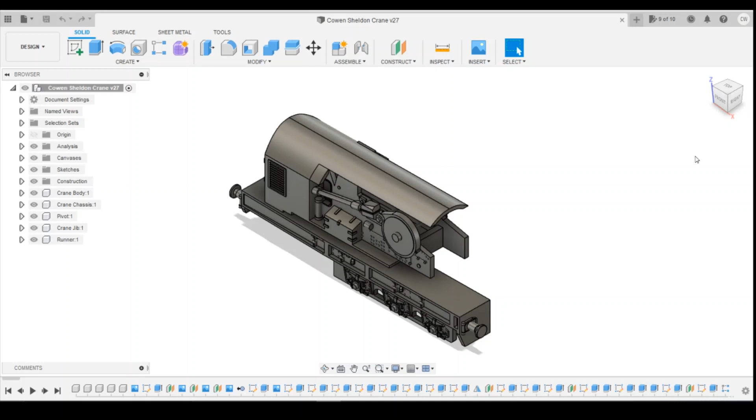The issue that we're going to have, or I think it might become an issue, is what we're going to do about couplings, especially if we start adding details. We're going to add it, and then we might have to think about potentially removing them in the future if they're going to get in the way of whatever we do with couplings, which is something that will need a bit of thought, because obviously 3D printed couplings, especially on something like this, because there's no lateral play, it's going to struggle to go around corners.

So it might be that we look best to have some sort of wire or hoop or something like that, something like a wire coming out of one of them and then a D-shaped hoop, a bit like a tension lock type thing. But it's something that at the moment is going to have a bit of thought on, and I'll pick that up in future episodes.

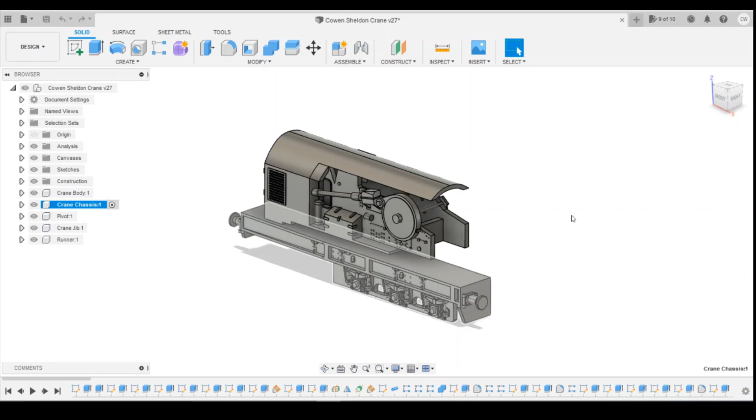Okay, so jumping into Fusion, let's make sure we've got the chassis turned on here. Okay, we'll jump down to the bottom here. So looking at the pictures, the location of them is slightly to the right of the buffers, and obviously they start below them. So we'll start by looking on this surface here. Now when I draw them, I'm going to want them to be connected to this surface so that they print. So I think I'm going to start by drawing this circular piece here.

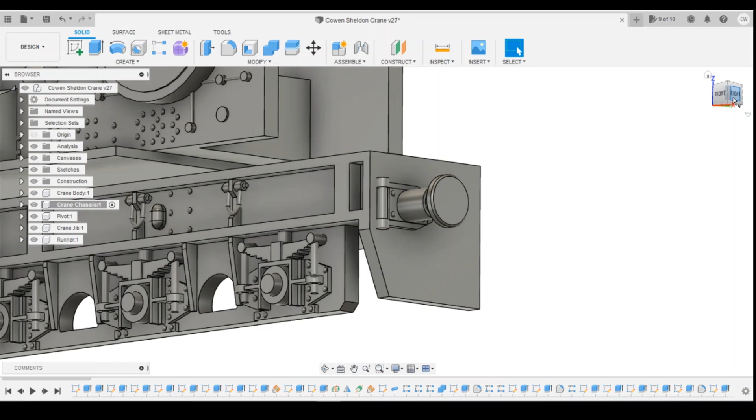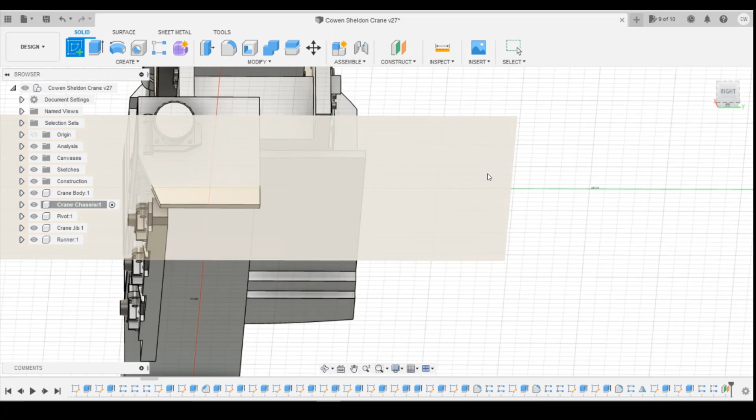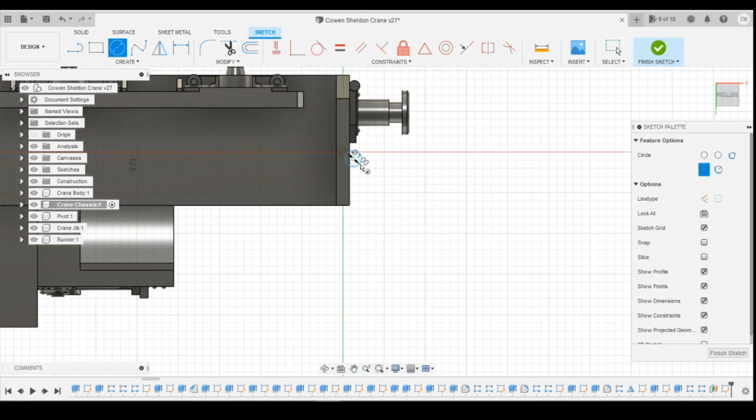So I'll be creating an offset plane from the base looking upwards. And looking at the picture, looks like it's about 6 inches up. So I'm going to go about 1.3 millimeters up, I think. Okay, then we can create a sketch on that surface, and then I'm just going to be using a circle. It's going to be off to the side of the buffer here, and I think we're going to go back here. Okay, so let's go for a 1 mil diameter circle, and define its position.

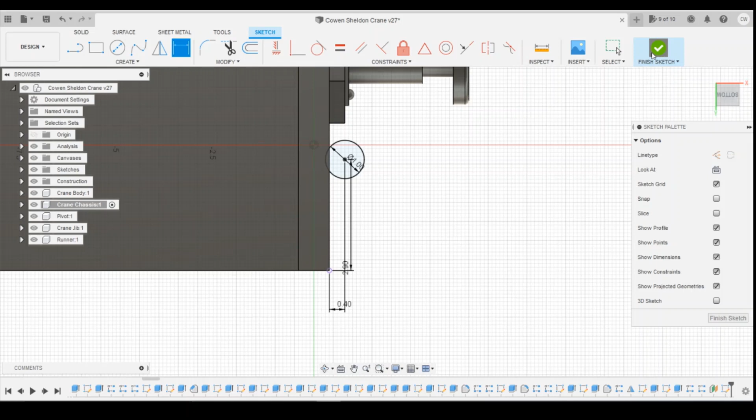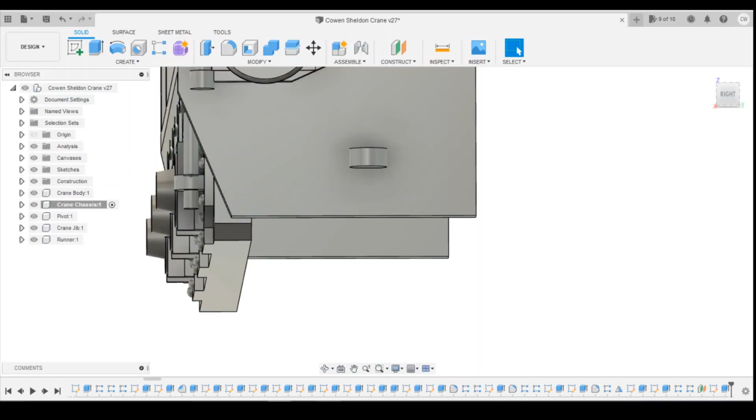So looking at the picture, it's not particularly thick, so I'm just going to drag that upwards, maybe half a mil to join. Okay, so these clamp-like shapes, I'm going to do an offset plane coming forwards from this face here, and I want that plane to intersect the middle of the circle here, so it's 0.4 millimeters, and then I can draw on that surface.

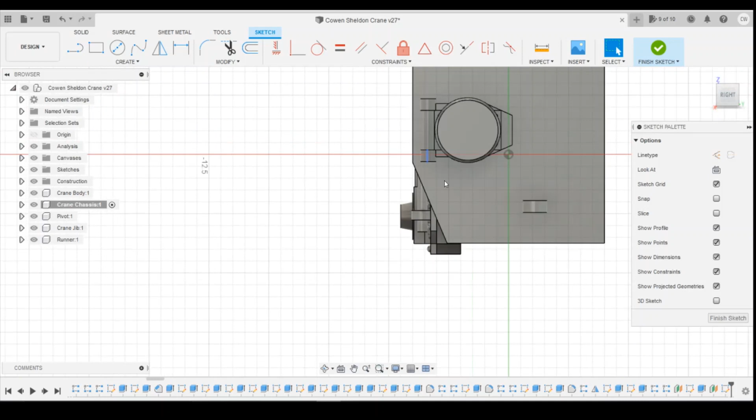Okay, so let's have a look at the shape. So it's like a little bit of a circle, hole in the middle, and then a cut out at the bottom. So easiest thing there is if we take a circle, let's do a construction line actually. So if we come across, we're going to want a construction line going upwards. Like that. Just want it to be turned to construction. Define the distance from there to there. The other way. Delete that. From there to there. It's 2.9. So now we know we've got the centre point of that circle.

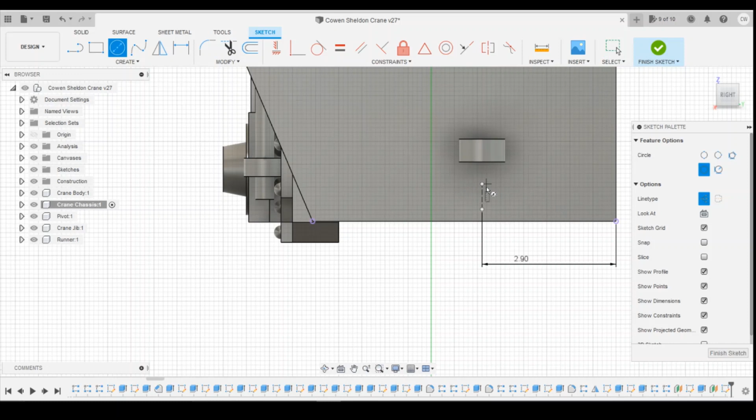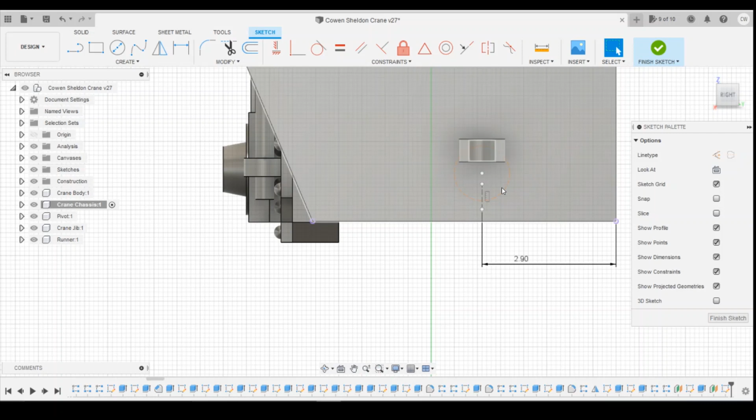Okay, so we can now snap a circle to that line there. Are the clamps bigger? Yes, they are slightly, so we need it to be bigger. I'm going to go for 1.2 mil. I didn't want that to be construction. Turn that back off. That's it. And define its position.

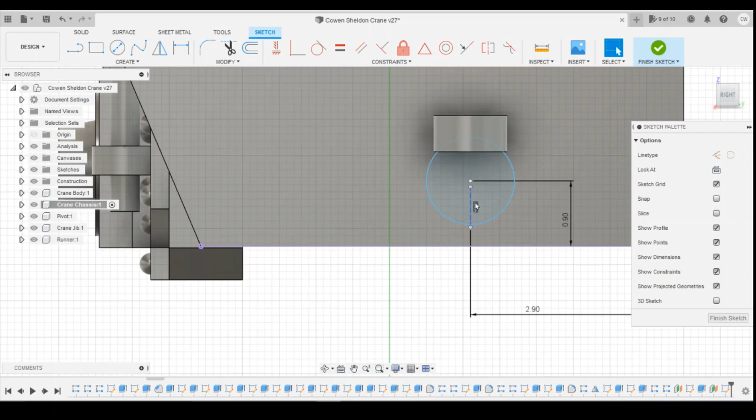I'm going to bring that down slightly. Maybe a bit more than that. Okay, and just for neatness, we'll define its position. But let's try again. So that circle to that point there, 2.9. Define the radius.

Okay, then we'll put another circle on the inside of this. Let's give it a clamp shape. I think I'm going to go for 0.7.

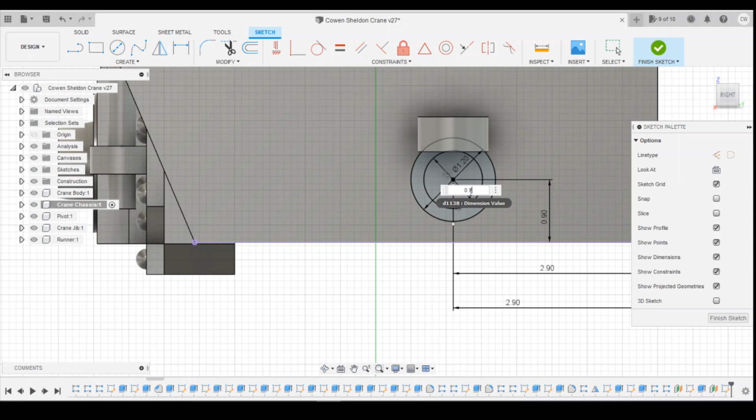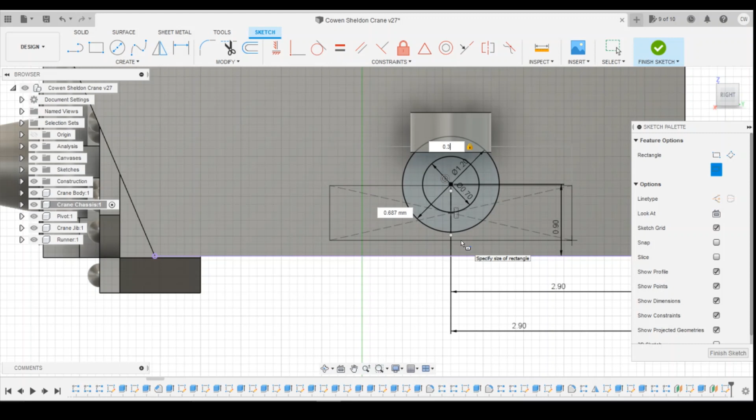Okay, and then just going to do a little rectangular shape. Let's use a centre point rectangle actually. If we line up there, it's going to snap there, and come down, and across that I'll open those up. And all this rectangle is for is so that we can select that as a profile, and we've got the open jaws type shape.

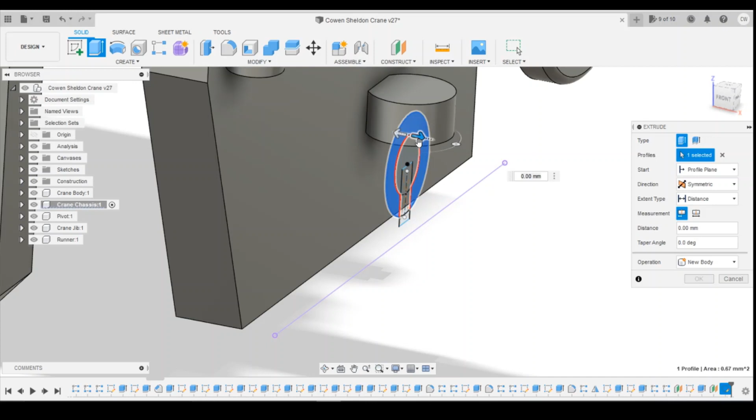If we extrude this, I'm going to extrude it symmetrically, I think. I want that to jump into this back plate here. I want it to join. Okay, does that look right?

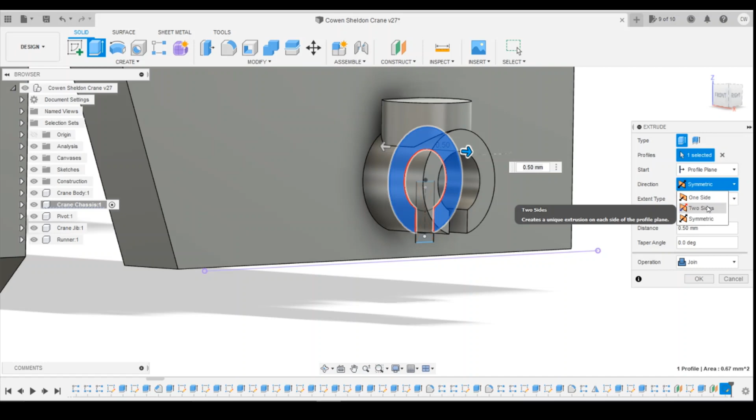No, it's quite thin, that's probably not going to work. So if I go change that from symmetrically to two sides, let's bring this one in. I want it touching the back so it's got some support, so when it prints it's clean. Yeah, I think we'll go with that shape.

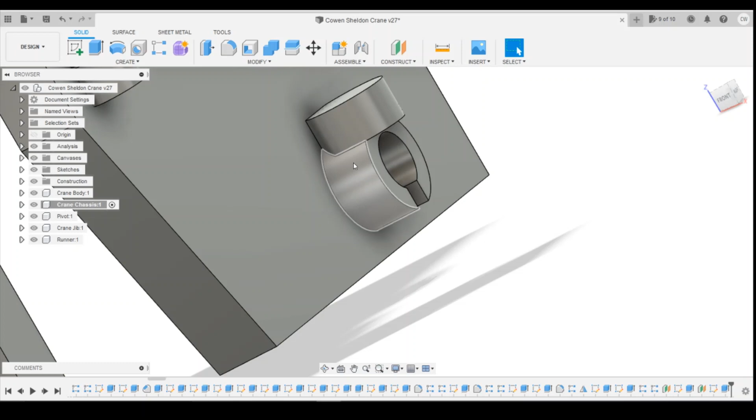If you wanted it to just be sort of hanging, don't extrude this to the surface here, but I think in N gauge you're not going to see it, and I think the supports are going to be much better doing that than they would be trying to catch the floating parts.

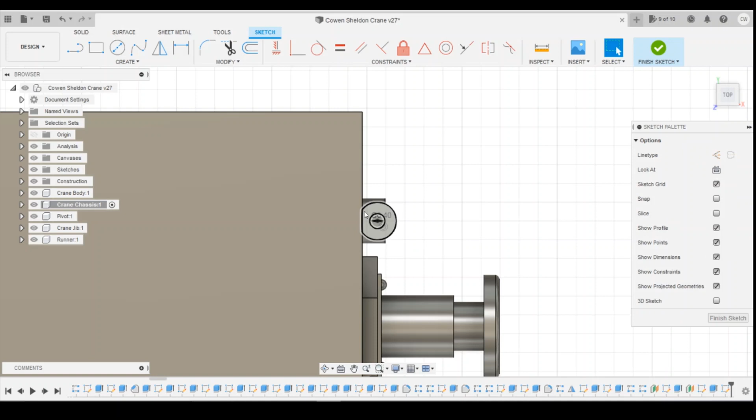Okay, so the next thing we'll do is draw up - there's a tube that comes up from here, so again we just use a circle in the middle there, and we'll go up 0.4 millimeters, so it's got a little bit of meat on it. Extrude this upwards.

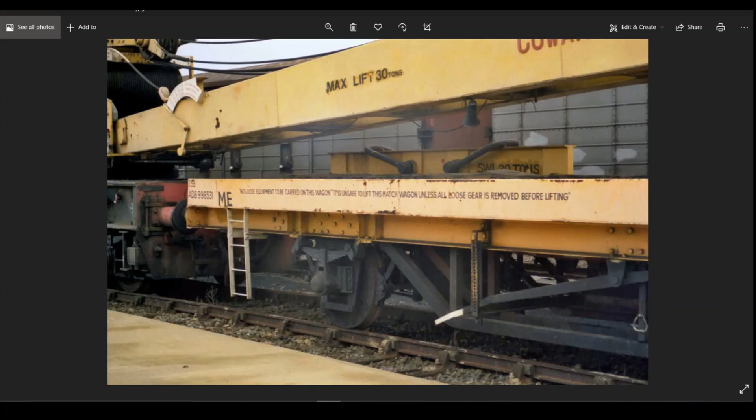Joining. That means some of these haven't joined. No, they're all fine. Okay, so height of this bit is still below the buffer.

So let's have a look where that brings us. Yeah, it might be too long. Bring it down a little bit. Yeah, we'll go with that, 1.4.

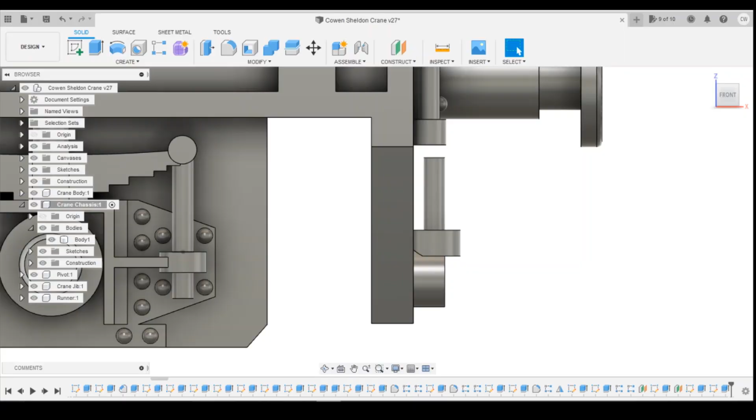And then it's got like another circle on the top facing the other direction, and then a loop. Okay, so for that we draw an offset plane from this one, and if we come 2.9 millimeters, that'll put us in the center here, and then we can draw on that plane.

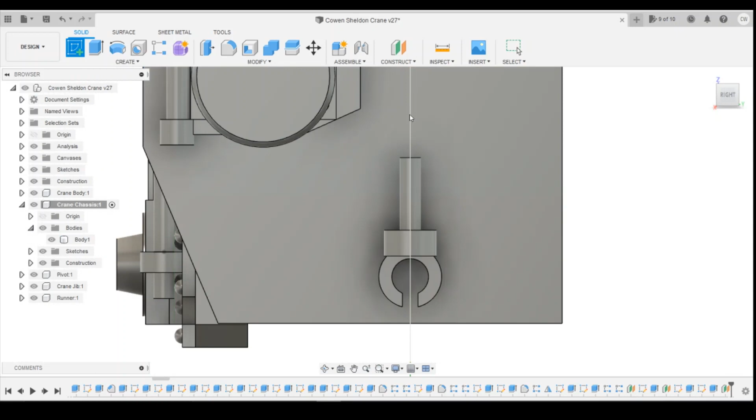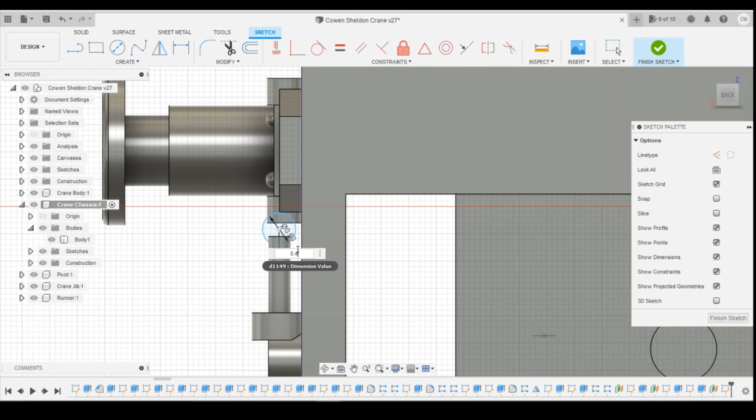And again, it's got like a circle type shape. I want to find the center point of that in a second. I'm going to go for 0.6. To find the distance, which we had earlier, is 0.4, so that's now lined up in the center. To find its height, 0.3.

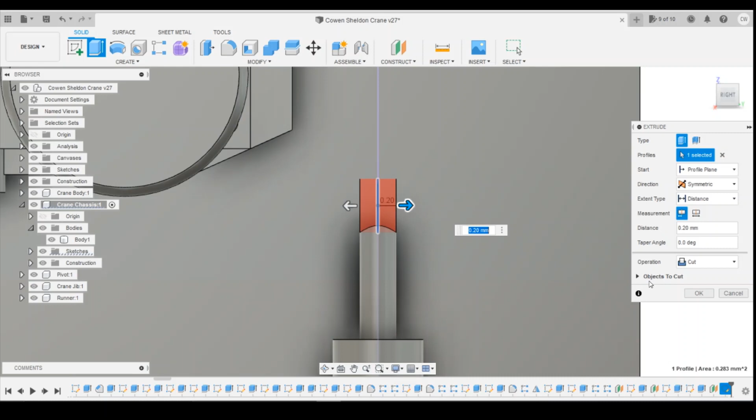And then extrude this. This one we're definitely going to do symmetrical. And we're going to tell it to join like that. So now I've got an opposite circle on top there.

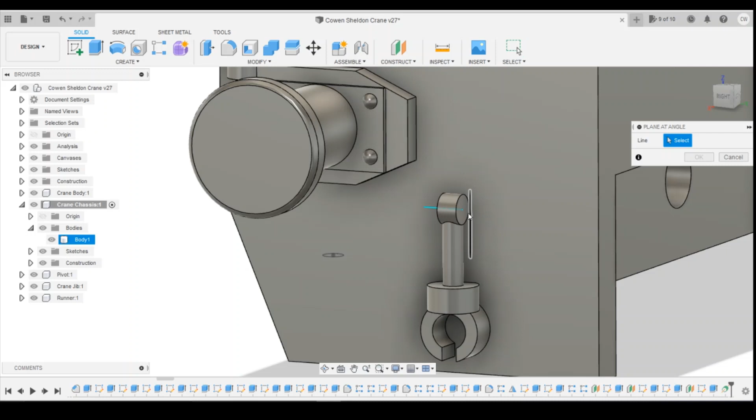And then it's got like a ring that goes back into the body here. Okay, so to make sure that we get the loop going through there, we do axis through center points, and then we can do a plane at an angle from that center point.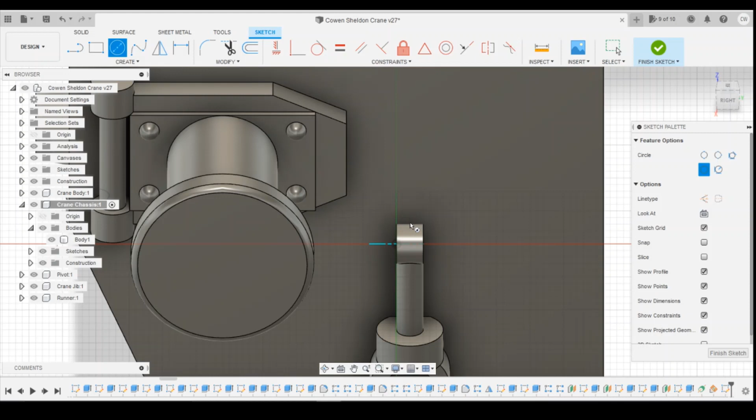We'll go for that there, and then we can draw a loop shape off of that. Pipe that.

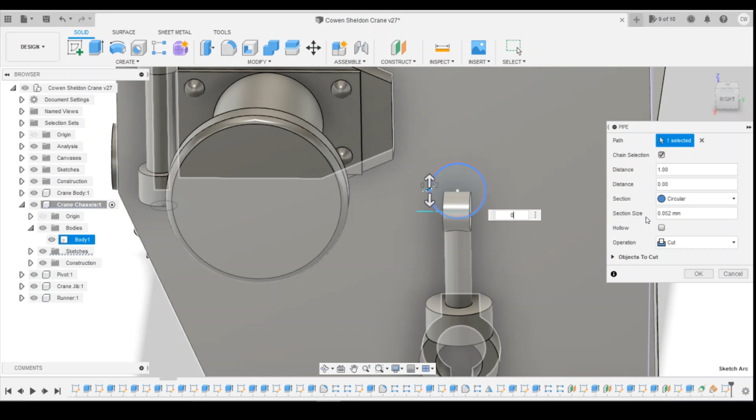And 0.4 is probably a bit too big there. Let's bring that down. Okay, now we can see we need to move this slightly because that's not sitting with the bottom bit on that center point, so we're going to move it ever so slightly.

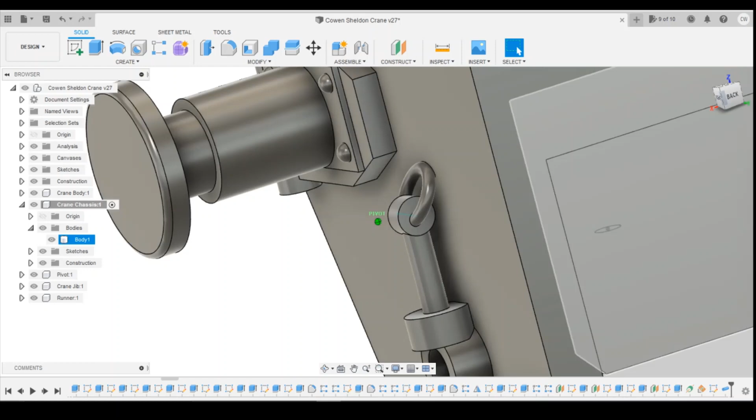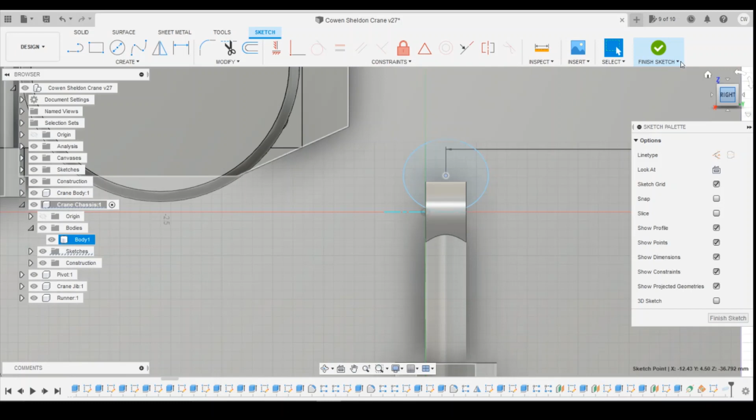Come back into the sketch. Okay, let's grab that and drag it up slightly so that the bottom bit is sitting on that red line there, which we know is halfway through that center point there. There we go. And you can see it's also cut into the back here, which is great because that means it's now also supported at the top here as well.

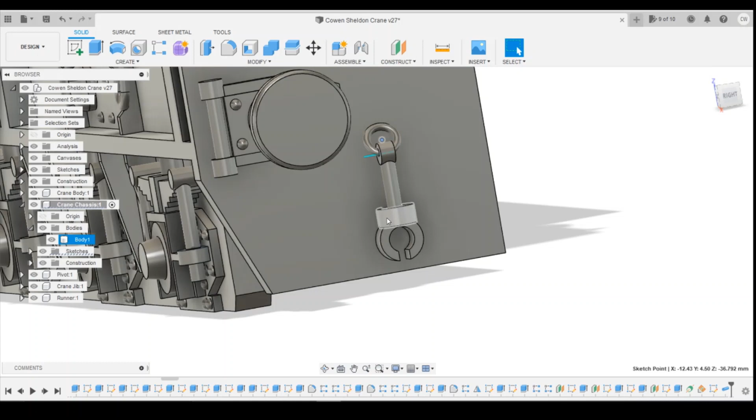So this prints, it's going to be supported at the bottom and coming up through the top. Yeah, I'm going to be happy with that. I know it's not perfect, I know it's not exactly how it looks in the photos because we've got this being a bit thicker, but I'm looking for the reliability on the print here as well more than anything else.

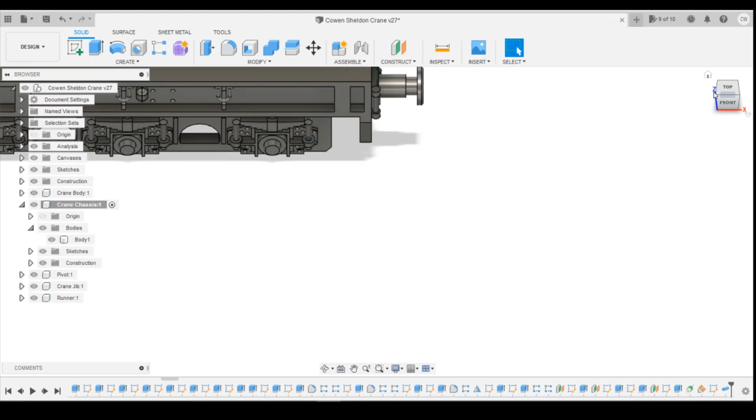Okay, so the next thing I'm going to draw is on the other end. I'm going to draw the lamp irons here. So if we jump back into Fusion, I'm going to flip this round to the other end. So we can see that the lamp irons sit above the buffers.

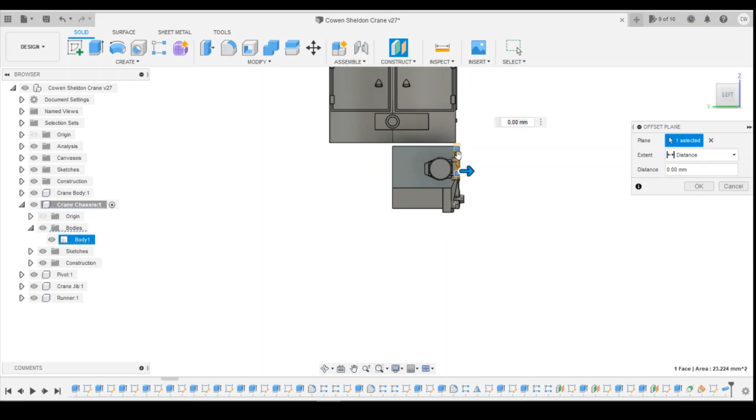So we're going to do an offset plane. I'm going to bring them in so they're about halfway, two thirds of the way across the buffer, and then draw that shape on an offset plane. So construct an offset plane from that base. As I said, bring that - oh, actually cancel, that offset plane would be at an angle. We don't want that. We'll do an offset plane from that, which we know is level.

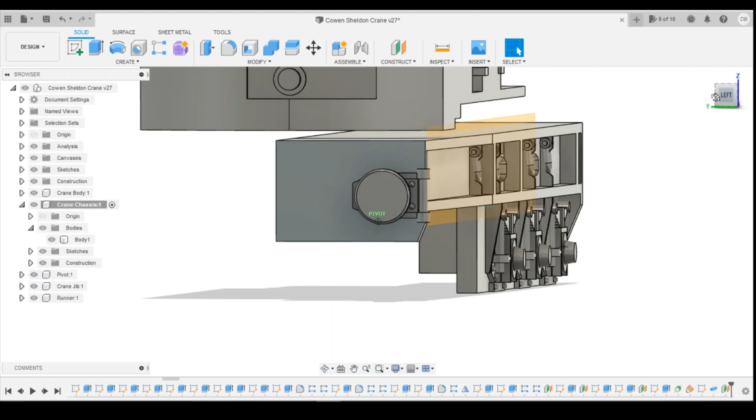I think I'm going to go for that there, and construct on that plane there. Okay, so it's a bit of a weird shape for lamp irons. So have a line come out. I'm going to do a thickness of 0.3, and then I'm going to coincide that to the back plate here.

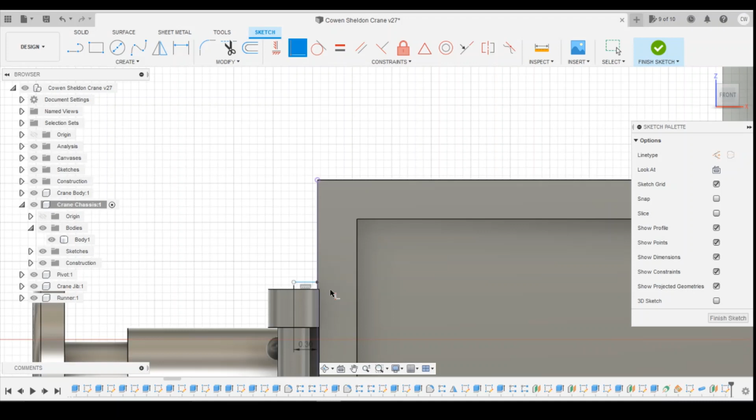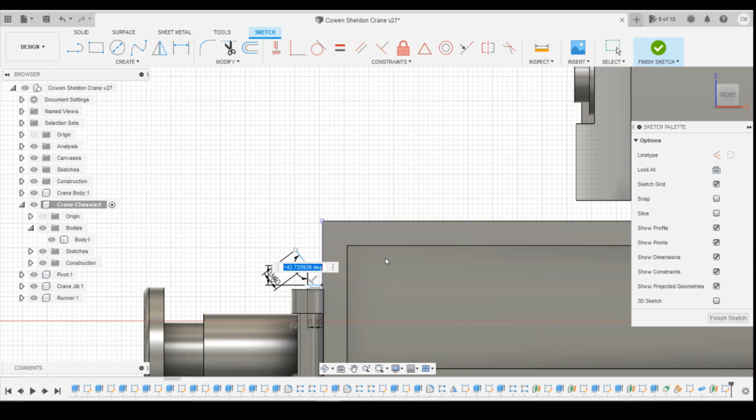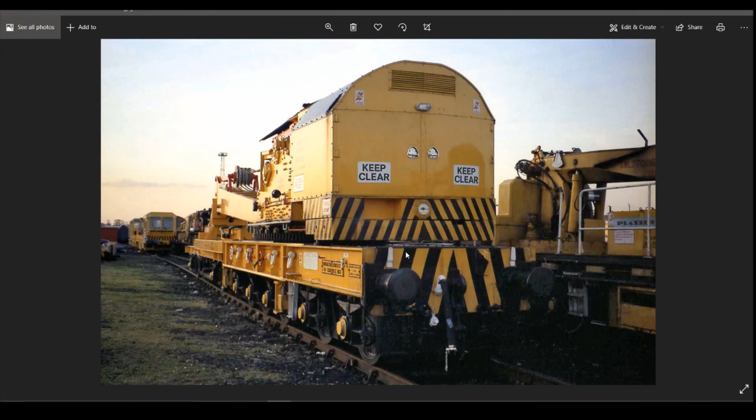I'm going to come up 0.4, diagonal 0.4 with an angle defined as, let's go for 140. And I'm going to bring this up. If we look at the picture, it's pretty much level with the top surface here, so I'm going to constrain that horizontally and vertically to that point there, and find that height from there to there. There we go, that's 1.3.

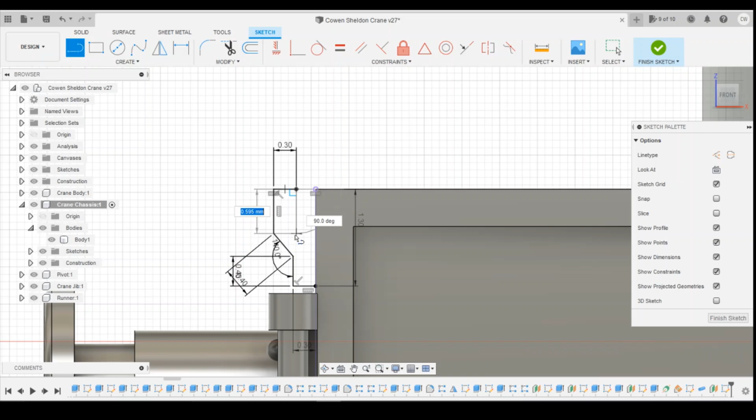Okay, and I'm going to come back in here. I'm going to do a thickness of 0.3 and then match down like this, and then that will be all constrained. An angle drawn on there - nope, that's already in. That'll be wanting that constrained. There we go, and then we can extrude this.

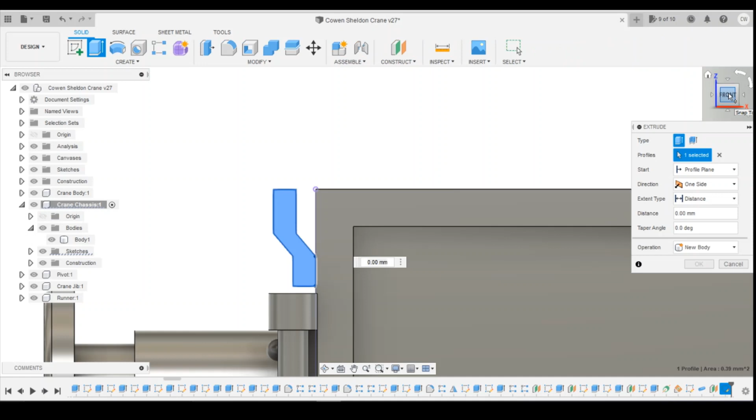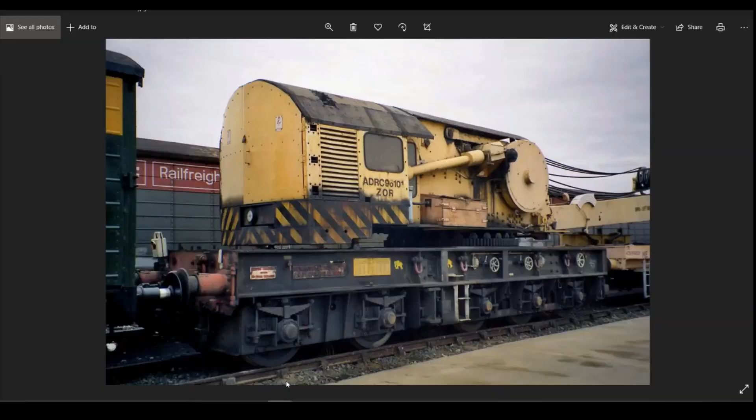We might want the bottom bit to be a bit shorter actually. And it's also pretty much on top of the buffer, so it does need to come down. Okay, so let's go back into that sketch.

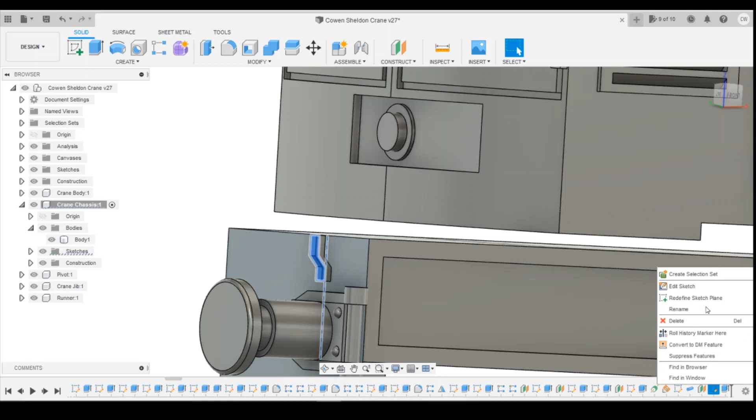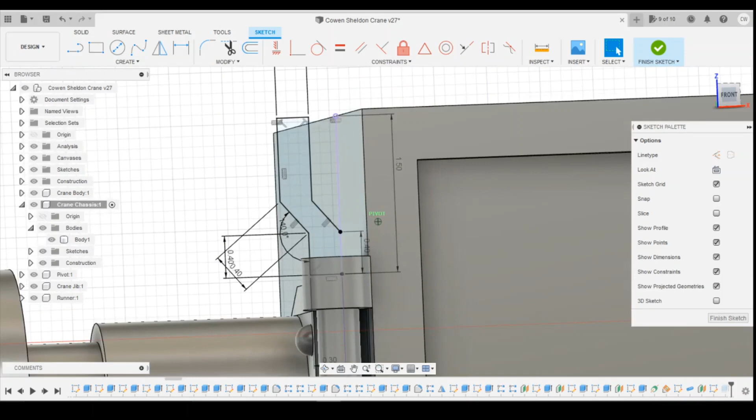Okay, and I want to increase this. I'm going to go for 1.5. And I'm also going to drop this down 0.3, same here, 0.3. And then I've got that taller bit at the top, shallow at the bottom. Yeah, that's what I'm looking for. Okay, and yeah, it's not perfect, but it's going to do.

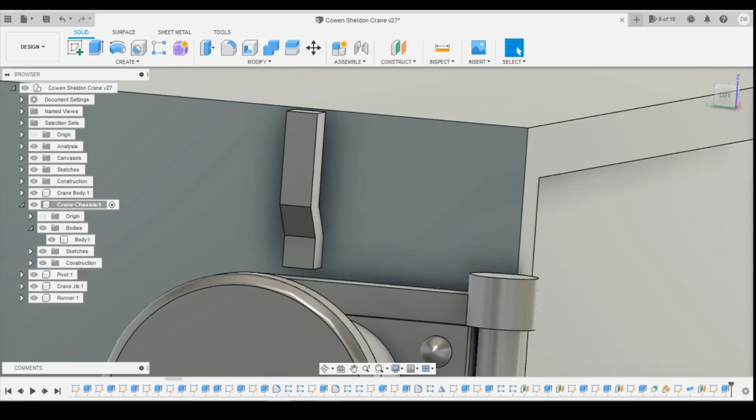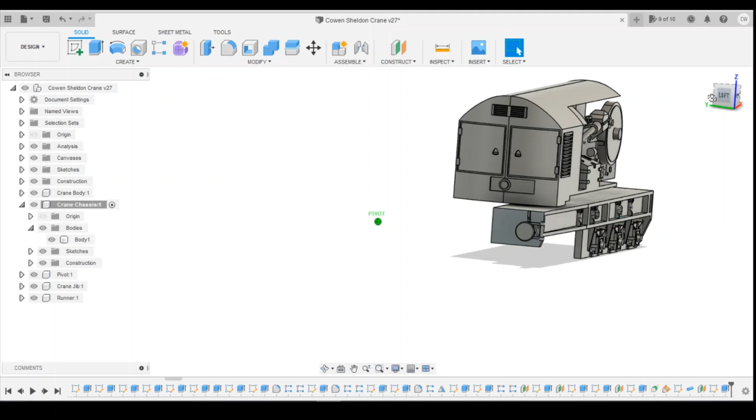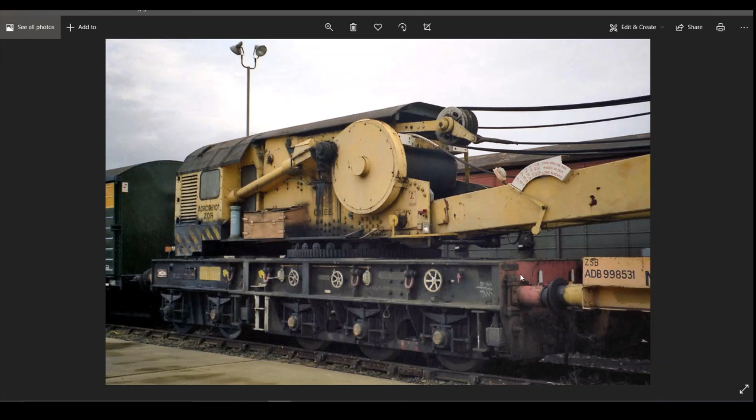Okay, looking at the lamp irons on the other side, they're slightly further inboard and slightly lower. So we'll use the same sketch, copy across on the plane, and have a plane in a slightly different position. So if we come around to the other end, okay, I think the lamp irons are going to be sort of above - yeah, it's probably above where we've already drawn, so we can use one of these planes that we've already got here.

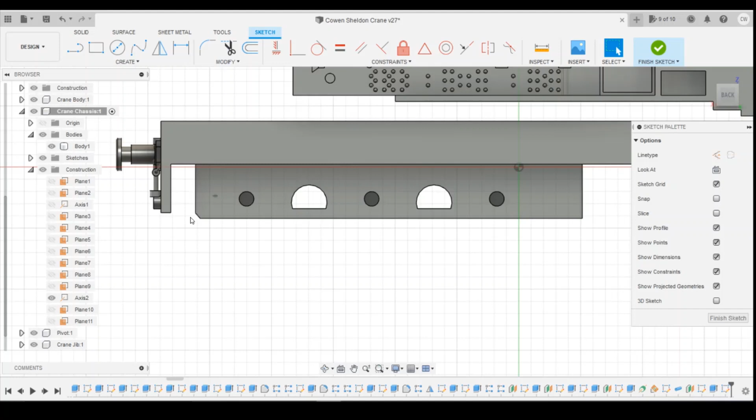Turn the right on, find a plane that's in line. So we use probably plane 9. So if we press sketch onto plane 9, we know that's already there. Okay, and then if we go back into, finish our sketch, go back into the other one, that open, come over here, and then we can just drag across all that geometry that we've got there.

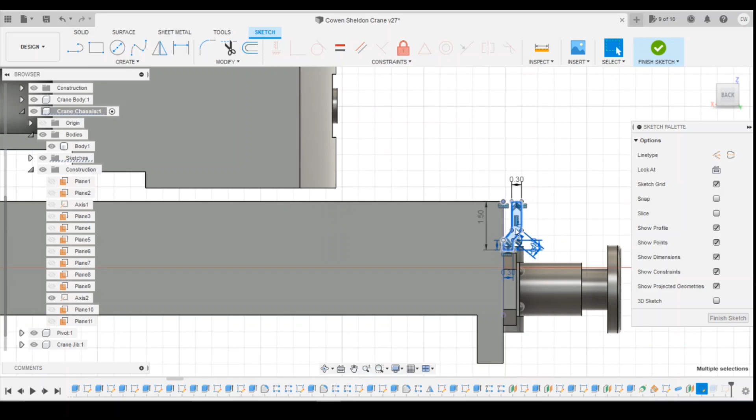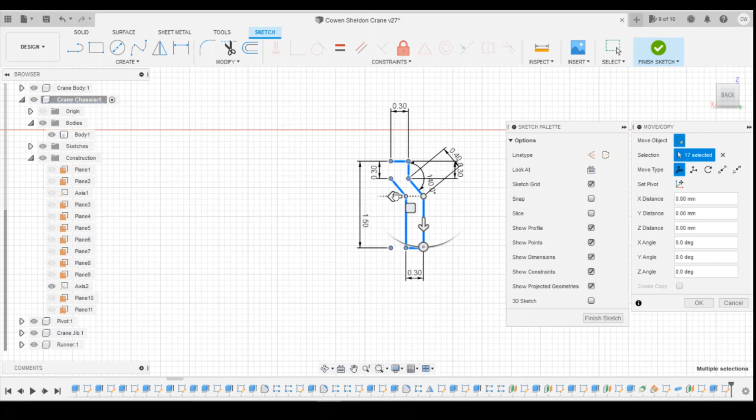Copy it, finish that sketch. We should then be able to come into that sketch and paste it on the geometry here. See how it's already quite handily turned upside down for us. Okay, so we'll drag that border over. Okay, rotate it through 180.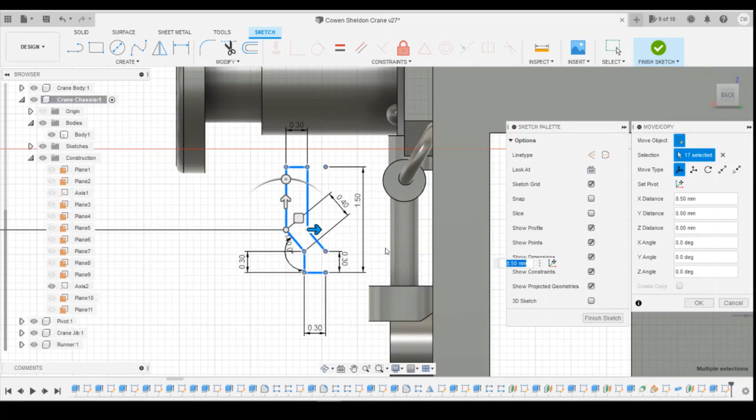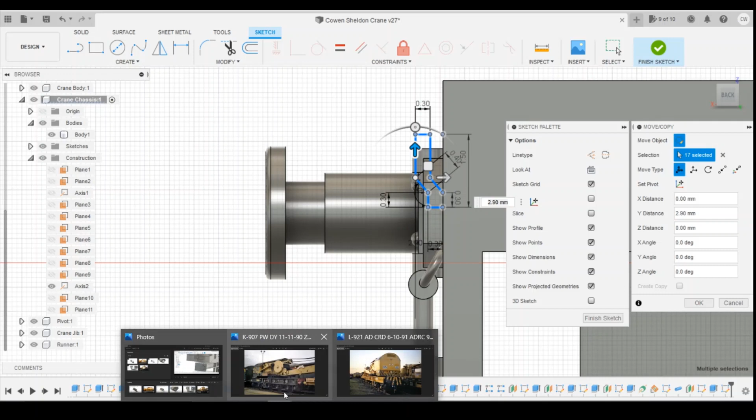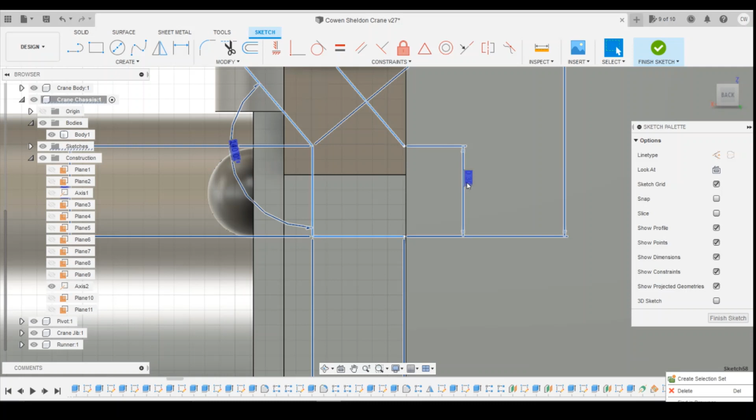Let's see, we've got relative height rise, so it's going to be slightly down from the top. It needs to be a bit higher still, I think - looks higher than the buffers. Sort that position. Probably need to constrain that point to that line there. There you go, then we can extrude this.

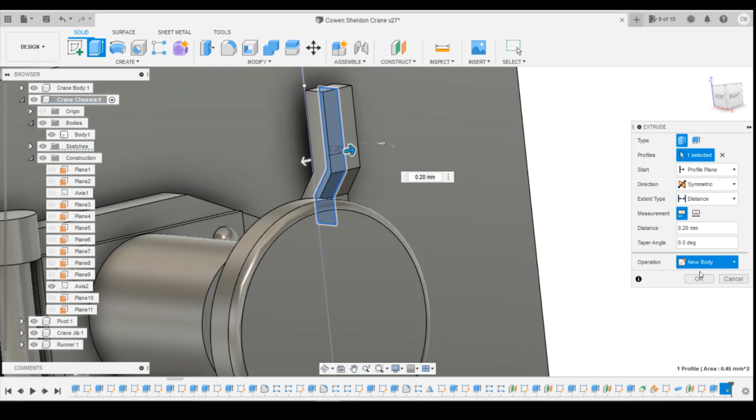Do symmetrical. I think 0.2 join. Okay, so we've now got that lamp iron on that side as well.

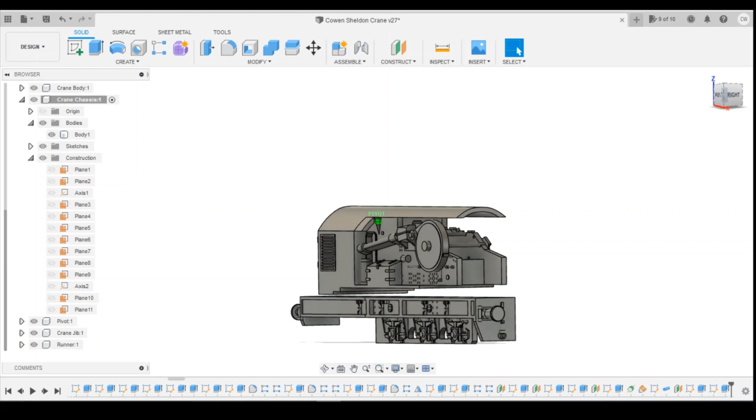Okay, I think we've got to the point here with the chassis at the moment where we're pretty much done until we mirror it over. So I'm going to do that now, and then we'll call that the end of the lesson. So just mirror bodies - there's only one body in here, which is fine, which is the underframe, and then we'll use the mirror plane being the inside surface here. And it's already joined, click on OK.

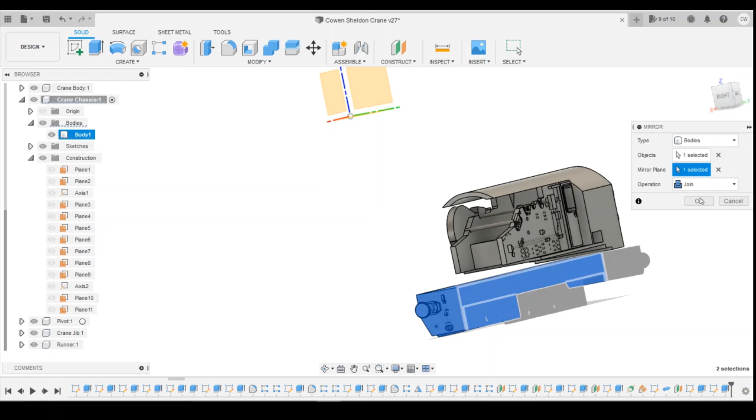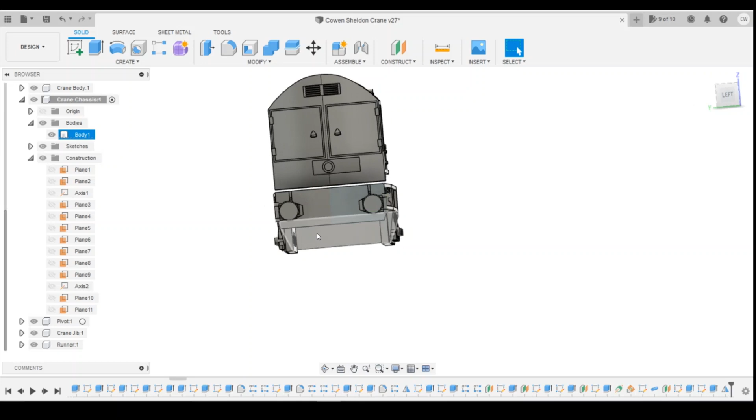Okay, so I think I'm going to call that the end of the lesson there today. It's about 25 minutes or so. So today's lesson, we've done the lamp irons on both ends and what these look like, some sort of clamps on this end. I'm not going to put them on the other end because I think they're going to hang down too much and interfere with any coupling or anything we've got down on this end.